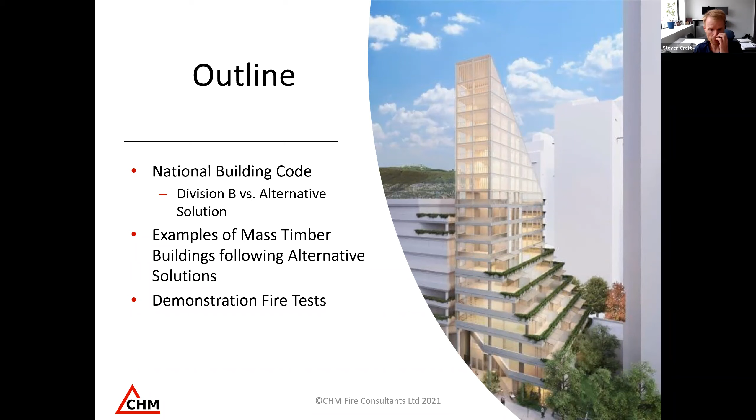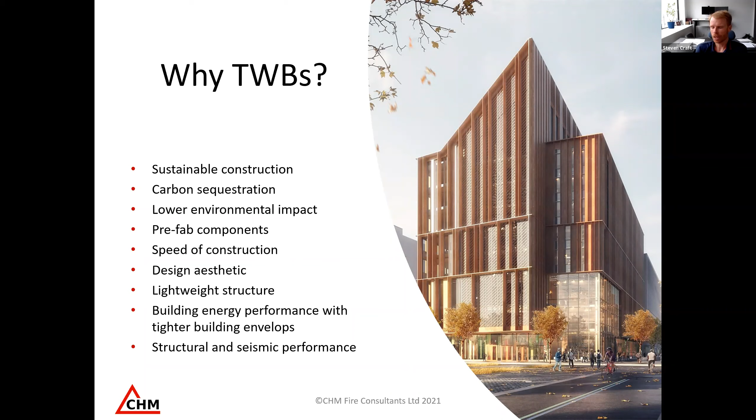I'm sure many of you are familiar with mass timber and some of its benefits. I included this slide because there are many different benefits, and some are realized on some projects and others on different projects, so they don't necessarily apply to every project. Things like sustainable construction, carbon sequestration, and overall lower environmental impact. But then there are practical aspects such as speed of construction due to components being prefabricated, so they show up on site and are quickly put in place, and the building can go up very quickly. Other potential benefits include a lightweight structure if soil conditions are poor—a mass timber building is going to be significantly lighter than a concrete building. One big aspect is the design aesthetics: with mass timber buildings, as opposed to concrete or steel, the structure is on display and is part of the interior finish. Certainly many mass timber buildings, that's a big part of it, and we'll see a couple examples of that today. In some projects there might be benefits to just the structural system, perhaps how it satisfies seismic performance or energy performance, so those will be project specific. But that's just some of the reasons why so many developers and architects are looking at mass timber these days.

With respect to the National Building Code, there are two ways to satisfy the requirements. One is to comply with the acceptable solutions in Division B, and that's, for example, for fire and for larger buildings, Part 3 of the building code. Of course, most buildings are designed this way.

It's certainly, when we're talking about average buildings, from a design perspective, it's very cost effective to follow the acceptable solutions in the code and basically follow it as a cookbook, and design our building that way from a fire safety perspective.

But there's another way to comply with the code, and that's using alternative solutions. Alternative solutions have to achieve at least the minimum level of performance required by the acceptable solutions in Division B, as defined by the objectives and functional statements. That's where many of these mass timber buildings come in, through the alternative solution process. We have to demonstrate that the building's as safe as what the code would require. So in many cases, when we're talking about taller mass timber buildings, that comes back to non-combustible construction.

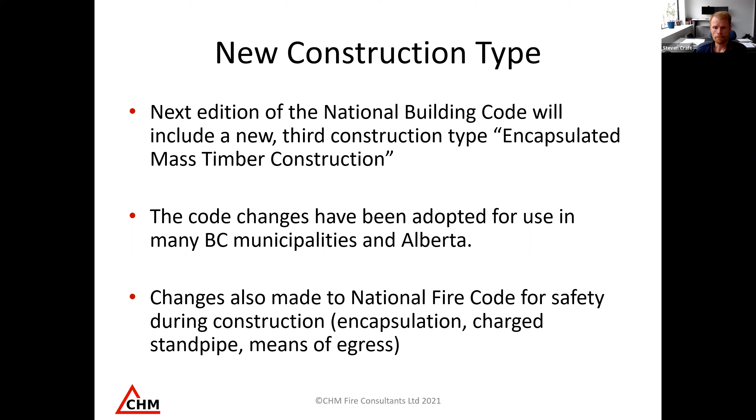So this new construction type, basically encapsulated mass timber construction, is exactly as it sounds: it's mass timber construction where a large amount of the structure itself is encapsulated. We'll look at how much on the next slide.

But these buildings can be up to 12 stories tall, with a height limit of 42 meters between the first floor and the uppermost floor. So whether that's the 12th floor, or perhaps the 10th floor, or perhaps a mezzanine, whatever the uppermost floor level is of the building. That 42 meters can be a little bit restrictive on a 12-story building, so it's something to keep in mind.

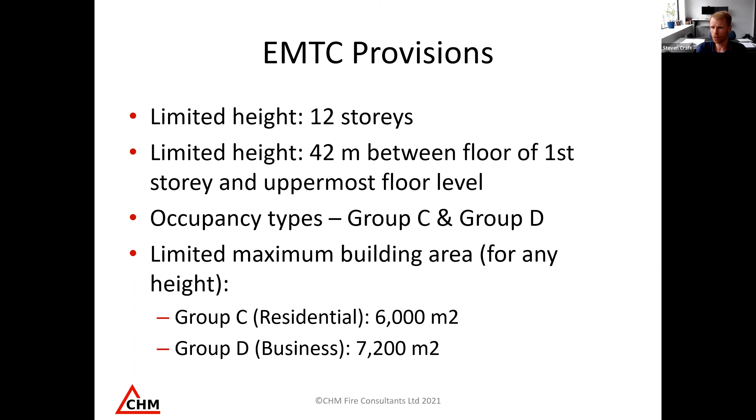Two primary occupancy types, Group C and Group D - your residential or office or professional services. The maximum building area, these are quite large buildings. The building area, basically the footprint of the building for residential, is 6,000 meters squared, and for Group D or business, 7,200 meters squared. So these are quite large buildings, as you can appreciate.

So some of the requirements for encapsulated mass timber construction, this new construction type: mass timber has minimum sizes. In developing these code provisions, there's a recognition that mass timber performs a certain way, largely because of its size, because in a fire it behaves differently than, say, light frame construction. Based on that, there are minimum size requirements for the mass timber itself.

These buildings are going to have 2 hours of fire rating for the floors, and of course supporting construction as required in the code. So basically what we would expect for a high-rise building.

Then for the encapsulation, there are generic solutions as well as a performance-based solution. The generic solution is 2 layers of 1/2-inch Type X gypsum board, on columns, on walls, on ceiling, basically on the mass timber. On the floor, the generic solution is a 38mm thick gypsum concrete or concrete topping - so 1.5 inches of concrete on the floor.

To deviate from these generic solutions, there's a new test method created under the ULC Fire Test Committee, known as ULC S146. Basically it looks at preventing temperature rise of the mass timber to a certain point for 50 minutes. The other requirement is that the encapsulation material be non-combustible. So things like mineral wool insulation could satisfy that, for example.

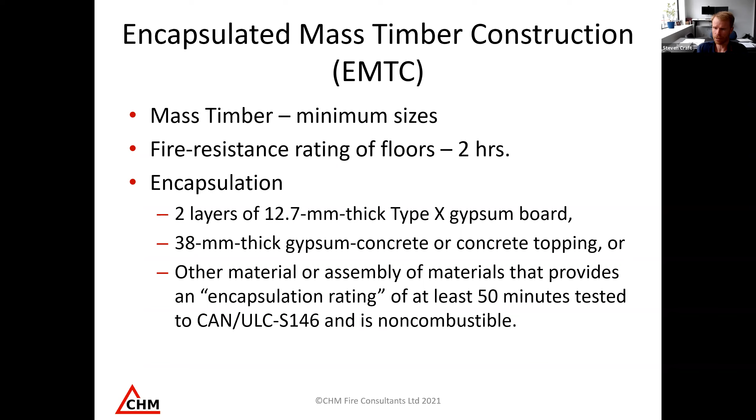As the name suggests, encapsulated mass timber construction means the structure is largely encapsulated, typically with gypsum board, but there are some exceptions allowing for some exposed mass timber in these buildings - exposed beams and columns with an area less than or equal to 10% of the perimeter wall area. This might sound a bit strange if you don't realize where these numbers come from. They've come from research tests where the amount of encapsulated or exposed mass timber has always been expressed as a percentage of the wall area.

That 10% limit doesn't allow for all beams and columns to be exposed, and it's rather restrictive. That's one of the reasons we see alternative solutions being proposed for these kinds of buildings, because architects would like to expose more than the 10%.

Similarly, in projects with mass timber walls—which is relatively rare, perhaps with the exception of exit stair or elevator shaft walls—generally we don't see mass timber walls. But if there are walls, up to 35% of the perimeter wall area can be exposed for mass timber walls, and ceilings up to 10% can be exposed. So if it's a CLT floor assembly, the ceiling underneath, 10% of that CLT can be exposed. Or if there's no walls, 25% of that ceiling.

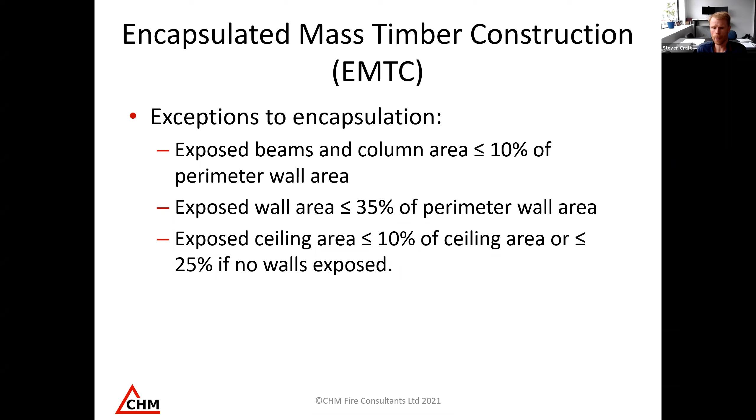So those are the new prescriptive requirements. And of course, the other way to comply with the code is through alternative solutions. Certainly the majority of projects we see right now are following the alternative solution pathway for mass timber, as opposed to following even the prescriptive requirements for encapsulated mass timber—which aren't accepted yet in many jurisdictions, for example Ontario. It's generally recognized that if you follow that design philosophy, it's a relatively simple alternative solution.

But once we deviate from that, it becomes more complex and we have to go back to research to demonstrate performance. So what I wanted to mention is that the alternative solution has to achieve at least the minimum level of performance required by Division B, in the areas defined by the objectives and functional statements attributed to the acceptable solution.

So basically, if a building is required by Division B to be non-combustible construction, and we're developing an alternative solution using mass timber, we have to demonstrate that the performance of that building using mass timber is as good or better than the non-combustible construction solution.

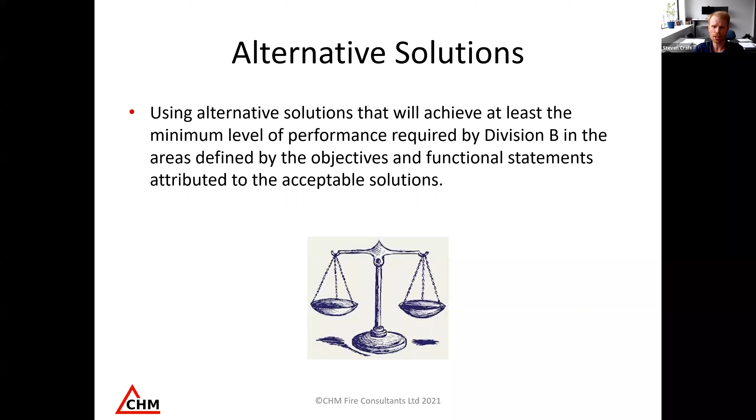So I'm going to just very quickly go over two projects. As far as exposed mass timber goes, they're at different ends of the spectrum, but I'd suggest they're both quite conservative designs.

The first is Brock Commons, which I'm sure most of you are familiar with. It's the very first tall mass timber building built in Canada, built in Vancouver at UBC, designed by Acton Ostry Architects. Fast + Epp did structural, GHL did the fire safety, and RDH did the building envelope.

This was an 18-story building: first level of concrete, 17 stories of mass timber. It's a student residence with 305 units. This building was constructed very quickly—in terms of actual construction, I think it was a couple floors per week. A large part of that was the simplistic design of the structure, but also the exterior wall was able to go up as the building went up. It was a pre-manufactured curtain wall, which was very efficient. It does have concrete exit stair and elevator shafts.

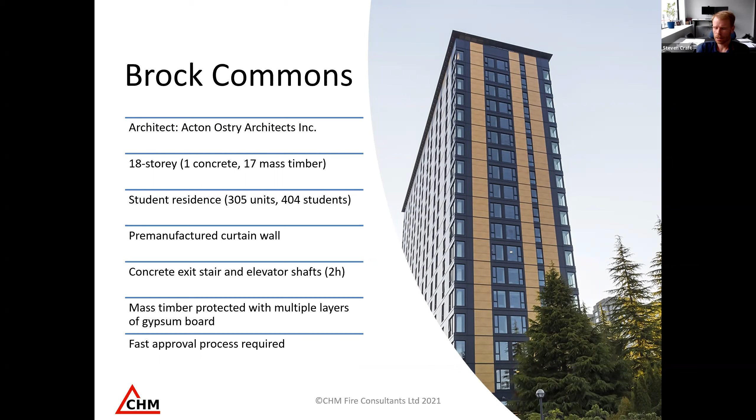And as we'll see on the next slide, this project was fully encapsulated. So the picture on the left shows the structure before the gypsum board was installed.

And the picture on the right depicts what the finished product looked like. Basically, there were 3 layers of 5/8 Type-X gypsum protecting the mass timber. So the 2-hour fire resistance rating required for this building was fully provided for by the gypsum board. Since the gypsum board is providing the entire fire rating, it really doesn't matter what's behind it, whether it's a steel structure or a mass timber structure. We would never expect that mass timber to ever be involved in a fire.

Because of that, this was a very conservative approach, basically not relying on the mass timber. We know that mass timber can have excellent fire resistance and inherent fire resistance, but in this particular project, they didn't rely on that at all. The fire rating was fully provided for by the gypsum board.

The reason they took this route was because they needed very quick approval if the project was going to go ahead as mass timber. I think they needed approval in a couple months. And as you can appreciate, prior to this, there were really no tall mass timber buildings in Canada. Probably the tallest one before this project was the Wood Innovation Design Center in Prince George, which was by code 6-story, but because it had a mezzanine, perhaps more of a 7-story building with relatively tall stories. So previous to this project, that was the tallest.

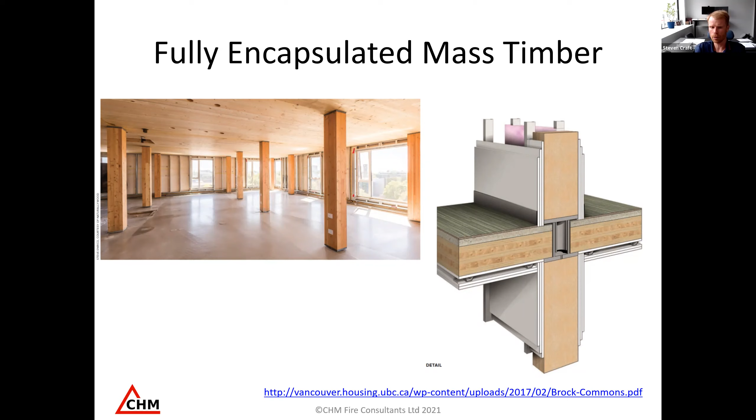So that's one end of the spectrum in terms of encapsulating the mass timber and demonstrating compliance through the alternative solution process. While the process for this project was actually a site-specific regulation - they amended the building code to allow for this design - basically the documentation and what was done for this project followed an alternative solution procedure, what we would expect would be submitted for an alternative solution.

The next project I'll touch on is one that has building permit approval, but I don't think they've broken ground yet. This is the arbor at George Brown College in Toronto. Moriyama Teshima Architects and Acton Ostry Architects are working together on this project. Fast + Epp are doing structural, and we're doing the alternative solution for mass timber, supported by GHL consultants for the other code compliance and alternative solutions not related to mass timber.

So this is a relatively interesting project. It's 10 stories. It's an A2 occupancy. Let's switch to the next slide.

So here's some renderings. As I mentioned, the building's construction hasn't started yet, but this gives you an idea of what the building will look like. Basically it's designed to be largely exposed mass timber. But if you look at the right top photo, you'll see that in the classrooms, for acoustic purposes, they generally have quite a bit of protection on the mass timber because of drop ceilings and whatnot.

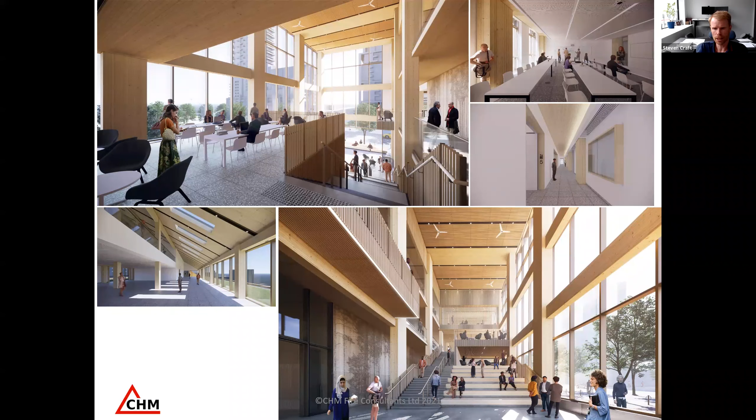So for this project, we went through the design process to basically demonstrate performance equivalent to a non-combustible building. It went through peer review as well as part of the process to approval by the City of Toronto. Some of the mitigating features I'll briefly touch on: again, we took a relatively conservative approach to this building, being the first A2 university or academic building in Ontario at 10 stories.

So one of the things we've seen in Toronto on other mass timber projects that has set a bit of a precedent is upgrading the sprinkler system from low hazard to ordinary hazard, group 1. That upgrade results in about 50% greater water delivery through the sprinkler system in the event of a fire. So this project has that. There are a number of upgrades to the sprinkler system, so that's one of them.

The second is having 2 connections to the city water mains, 2 separate connections for redundancy. Similarly, there's a second fire pump for redundancy, and a second riser with valves isolating each floor. The idea there is again for redundancy, so that if one floor needs to be worked on for a retrofit, the sprinkler system for the building doesn't need to be shut down, just that single floor can be. So those first 4 items are really targeting the reliability of the sprinkler system. We know sprinkler systems are very reliable as they are, something on the order of 90 to 95% reliable, and this is bumping that up to likely something on the order of 99%.

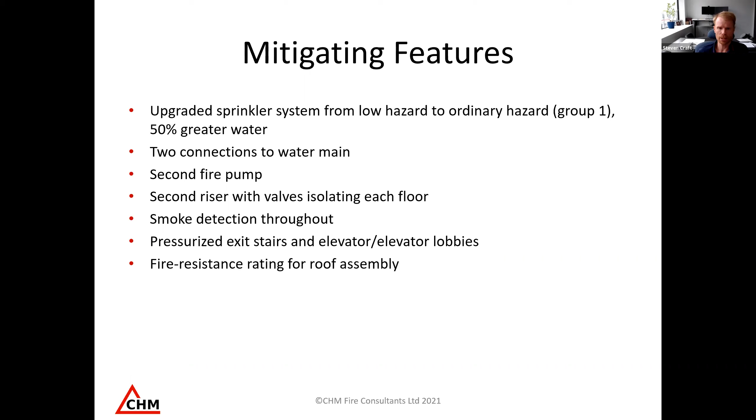Similarly, we're also working on the academic tower, a project at the University of Toronto. This is a 14-story building, and I won't go through the mitigating features, but they're largely similar to what we've done for George Brown, given that this is also A2 occupancy. So again, we've taken a relatively conservative approach, and again it's one of the first of its kind in Canada.

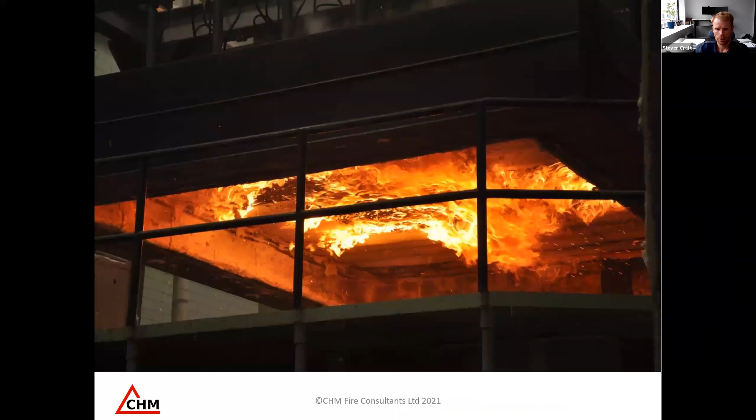One thing I'd like to point out, and we'll see this a little later as we look at some videos, is that mass timber performs differently than light frame construction. That's why mass timber in the latest iteration of the code has been somewhat separated out from combustible construction, since requirements for combustible construction are largely based on light frame construction.

Here's an example of a CLT floor assembly with gypsum board, protected by gypsum board, at the end of a fire test. This was well after an hour into the fire test. The gypsum board had started to fall off, and the test was terminated. This is the floor assembly being lifted off the furnace after the fire test.

The picture we're looking at right now is just as that floor assembly comes off the furnace, which is on the order of close to 1,000 degrees Celsius. So a lot of heat in that furnace, a lot of radiation up at that floor assembly as it's lifted off, and we see that the mass timber is flaming and burning.

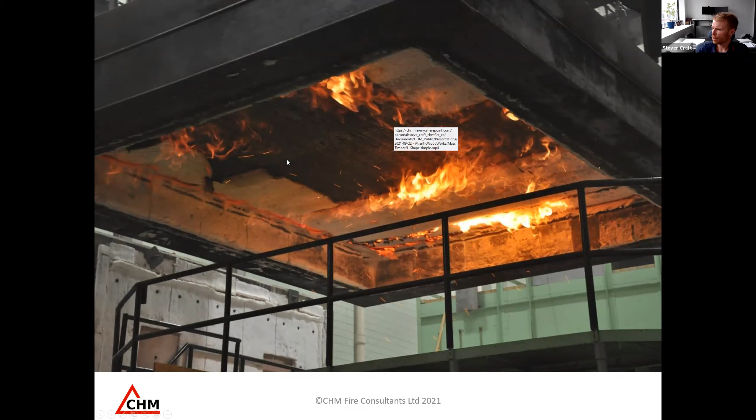In the next photo, you'll see that as the floor is moved away from the furnace, not even entirely moved away yet, but perhaps half of it is now to the left of the furnace, we see the flaming almost immediately goes out on the mass timber. In the central portion of the floor assembly, the flaming has gone out.

We do see some continued flaming around the edge of the gypsum board where the heat is somewhat trapped in, and we get some re-radiation between surfaces. But this was one of the first examples we had, about 11 years ago, when I completed this test, where we saw that mass timber doesn't continue to burn without an external heat source, whether that's fuel contents in a compartment or other surfaces radiating heat back. This was a perfect example of that, and we'll see it in the photos and videos near the end of this presentation.

I don't have time today to go through all the research projects that led to this point, in terms of having the building code recognize mass timber or encapsulated mass timber construction as a building type. But I will touch on a couple of more recent projects that perhaps aren't reflected in the building code today, or the building code as will be published later this year, and are likely to influence the building code in the next iteration.

The first is some testing done at Southwest Research Institute in San Antonio, Texas. There were a number of research projects conducted before this that led to changes both in the National Building Code and the International Building Code in the US.

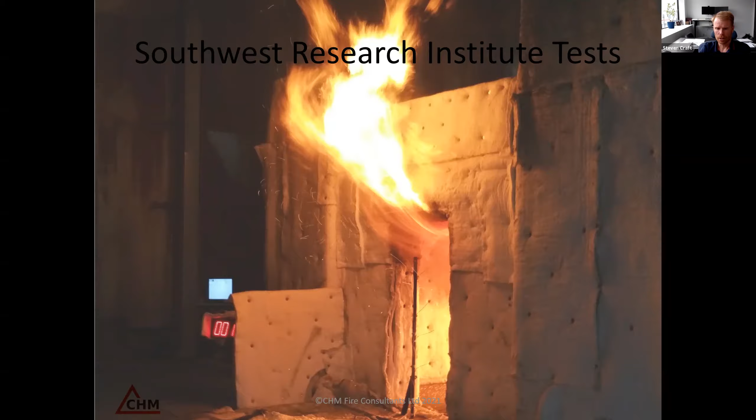One of the things that we want to see is that the fire will die down on its own, similar to non-combustible construction. A set of tests were done at Southwest looking at different adhesives, and a standard test was developed to test the adhesives in CLT. It's a full-scale test that basically tests the adhesive being used to ensure that the CLT doesn't delaminate and therefore affect the fire performance.

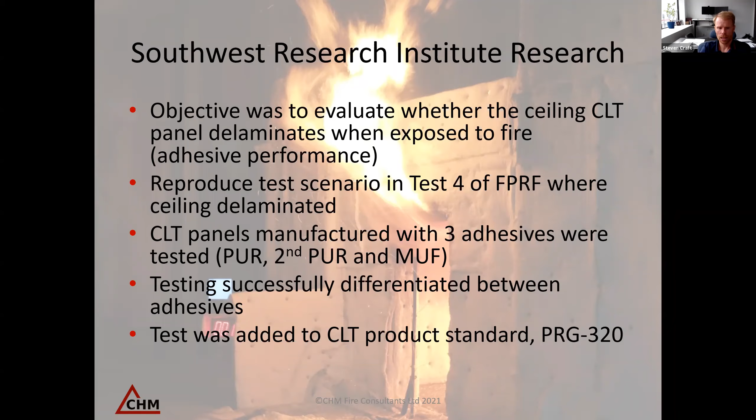After this change was made to the product standard, the National Research Council undertook a number of tests with this second generation CLT, to look at fire performance and see how it might be different. At their lab in Ottawa, they were restricted on size but were able to build rooms 4.5 meters by 2.4 meters by 2.7 meters high. A relatively small room, but we know that makes for a relatively severe fire test because surfaces re-radiate a lot more in a small space.

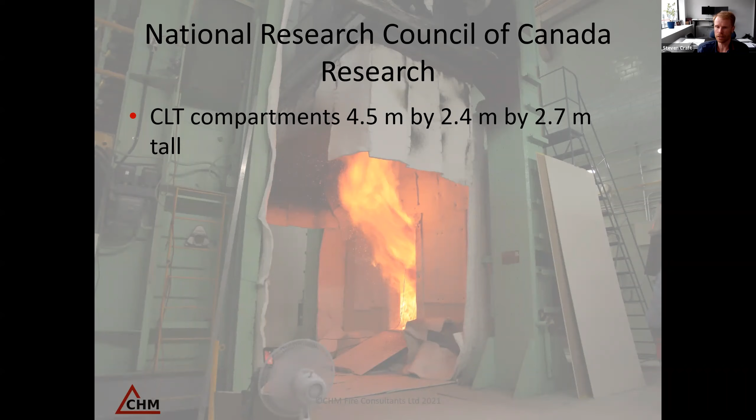CLT was used that was manufactured using the new adhesive requirements, and 5 tests were done. The first test was the CLT room with 3 layers of 1/2-inch gypsum board, and we saw no contribution from the mass timber as expected. That creates the baseline test that we compare the rest of the tests back to, to understand the contribution of the mass timber.

Test 2 exposed the back wall of the room and 10% of the ceiling, meeting the current provisions being added to the building code later this year. Test 3 had an exposed beam and column, or beam and 2 columns. Test 4 had an exposed ceiling with a beam and column. Test 5 had exposed ceiling and end walls.

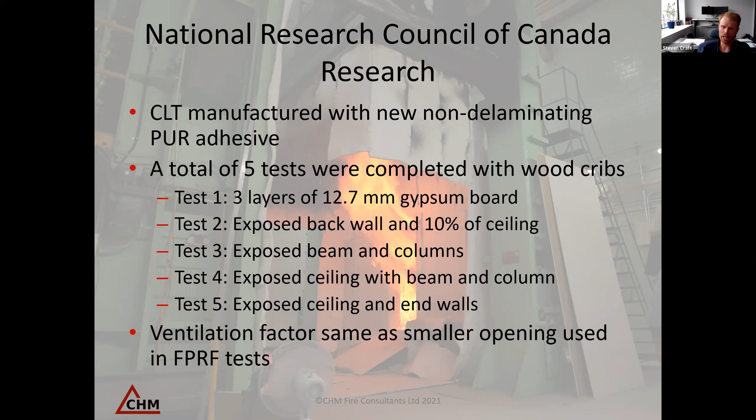It's test 4 that I really want to focus on here, because that generally captures the likely scenario for perhaps 90% of projects, where we have post and beam construction, beams and columns, and mass timber floors. In most of these projects we don't have mass timber walls, so test 4 best reflects the maximum exposed mass timber we might see in a project.

Here's the picture of the test setup prior to the test. The room is right here. There's a doorway - this is the only opening into the room - and there's a vent hood that captures the fire gases.

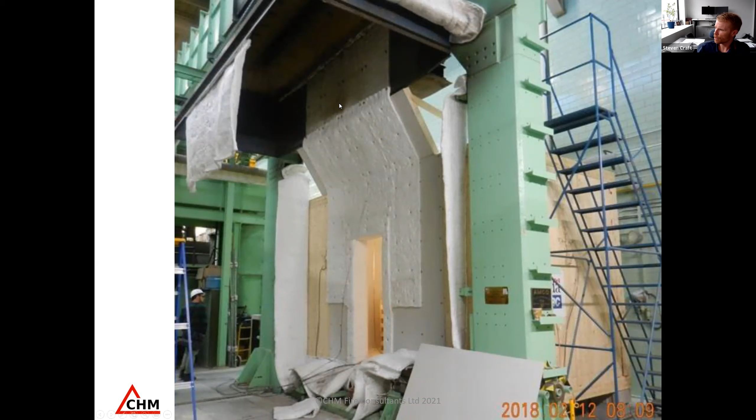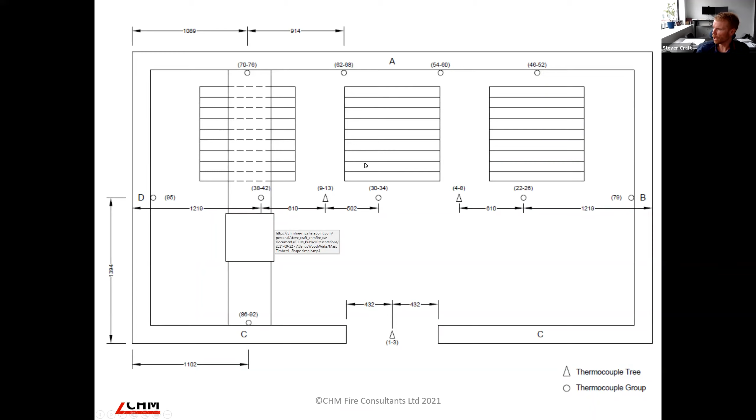It works out that the fuel load on a per-area basis is a little bit over the 50th percentile for what we'd expect in a residential building or unit. As you can see, there's exposed ceiling, beams, and the column. In these tests they were able to measure the temperature in the room, which allows us to compare between the two tests. Unfortunately, they weren't able to measure the heat release rate, which is a better way to quantify the size of the fire, but these temperature measurements give us a good idea.

So the graph on the left is for the fully encapsulated room, fully clad in gypsum board with 3 layers. The mass timber doesn't play any role in that fire, so that is likely what we would expect in a non-combustible building.

That has gypsum board on walls and ceiling. And then the picture on the right, or the graph on the right, shows the exposed column, beams, and ceiling room test. You'll see the temperatures, particularly after about an hour, continue for some time.

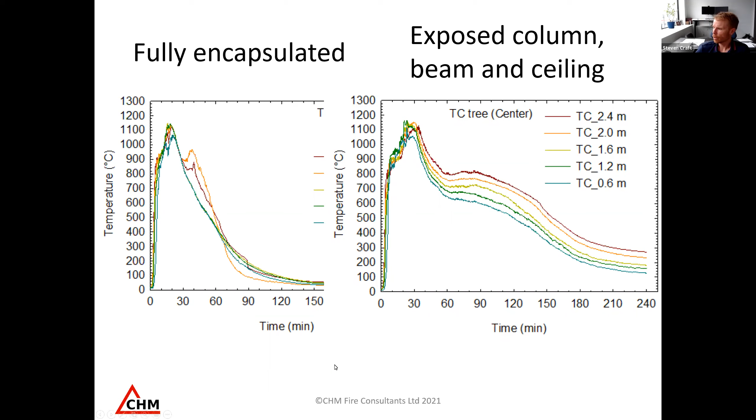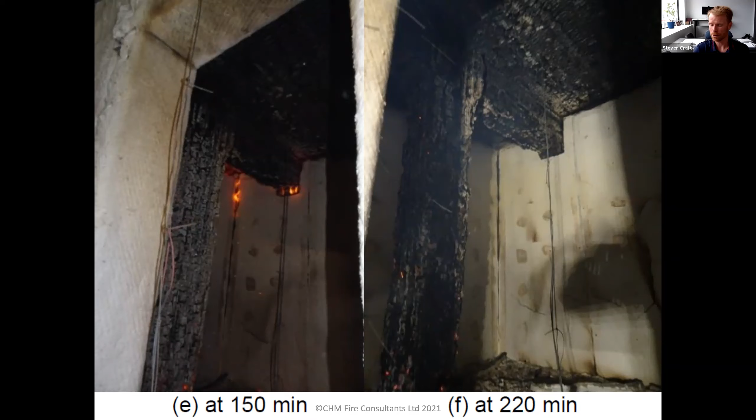After this test, we cut out a section of the glulam column and measured the dimensions of the non-charred portion. It turns out that after that 4-hour test, we saw charring pretty close to what we would design for a 2-hour standard fire resistance test, which is what a high-rise mass timber building is designed for. So that was interesting that it lined up fairly closely with what we're designing for.

So just a couple of the conclusions that came out of that research from NRC. First, it demonstrated that the CLT with the new adhesive requirements performed very well, and we didn't see any fall off of the charred wood or fire regrowth, which was expected, but good to confirm.

In test 2 and 4, remember test 2 was the case where there was 10% of the ceiling and the back wall exposed, which would meet the requirements going into the code to be published later this year. In both cases, the fire decayed once the room contents were consumed. NRC concluded from these tests that the scenario with the exposed beam, column, and ceiling is unlikely to cause a significant increase in fire risk.

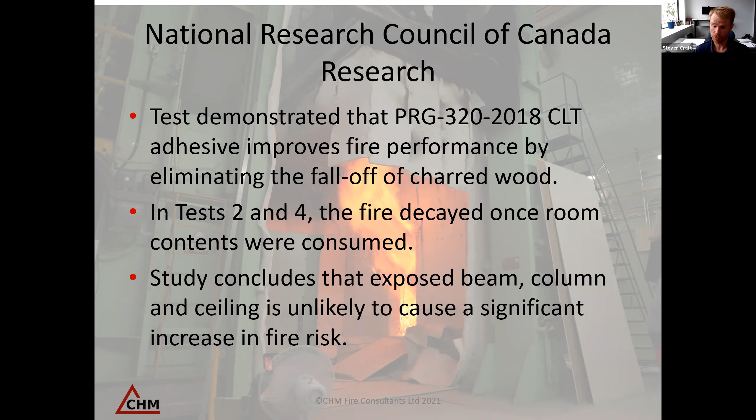So that was positive. As I mentioned, it's a relatively small room. It's relatively conservative from our perspective, looking at the fire dynamics. However, there's certainly a benefit to looking at larger structures.

And so that brings me to some demonstration fire test work that has been going on for about a year. This is a large project with a number of funders and partners. The funders include Natural Resources Canada, British Columbia Forestry Innovation Investment, BC Office of Mass Timber Implementation, the Ontario Ministry of Natural Resources and Forestry, Government of Alberta, National Research Council, and then partners include Canadian Wood Council, CHM Fire Consultants, and GHL Consultants.

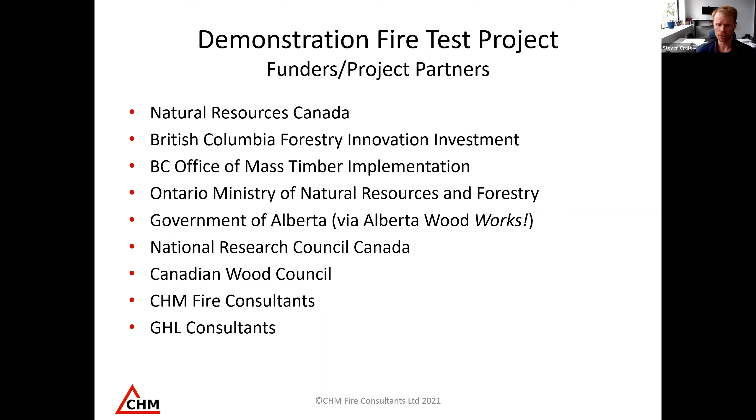Basically, we're planning a series of demonstration tests. Some pilot scale tests were completed earlier this year in Richmond, which we'll take a look at next, as well as some full scale tests being planned for Ottawa next June. So we'll just quickly touch on those.

I think these pilot scale tests will be of interest, even though they're small. It's really conveying some of these principles that I've mentioned earlier. So in the pilot scale demonstration burns in Richmond, there were 4 assemblies that were constructed. 3 of them are 10-foot by 10-foot boxes. One was light wood frame construction without gypsum board, basically representing a during-construction fire scenario.

The second box had gypsum board on the light frame walls and ceiling. And then the last one was mass timber. Really the aim of these three tests was to demonstrate how mass timber is different from light frame. So we'll look at that in the next few slides.

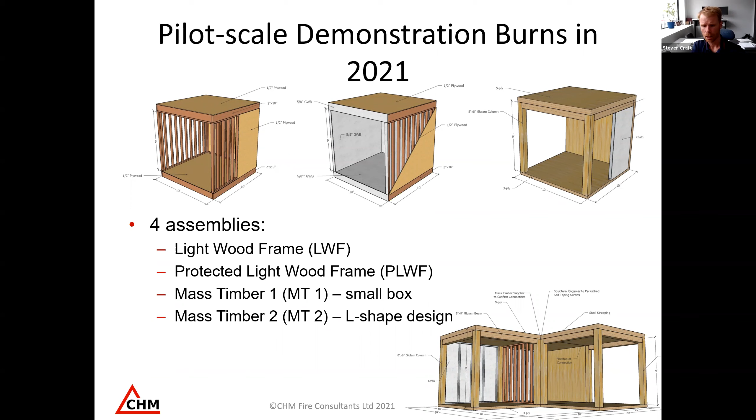And then the structure at the bottom was an L-shaped design, basically three of these 10-foot by 10-foot boxes put together to make an L-shape. So it was a slightly larger structure, again representing the during-construction scenario. These demonstrations were to provide information on the concern of a fire during construction for mass timber. But as you can appreciate, whether it's during construction where the mass timber is fully exposed, or in a finished building where the mass timber is exposed with perhaps differences in ventilation, the performance of the mass timber is quite similar.

So out of these three boxes, I have a quick video I'll play, which basically shows how each of these boxes performed when we had a garbage can fire representing a garbage can on site during construction. This is a relatively small fire, although as far as garbage can fires go, I would say it's probably about as severe a garbage can fire as we could design in terms of ventilation and whatnot.

But as you can appreciate, for the gypsum board clad room, we would expect very little damage or virtually no impact on the structure. For the mass timber, we expect the mass timber wall would be involved a little bit, but we would not expect it to spread to the ceiling. And then the light frame box, as we've all seen construction site fires on light frame buildings, we know how easily they go up. So we would expect that one to become fully involved. This was really an attempt to demonstrate that.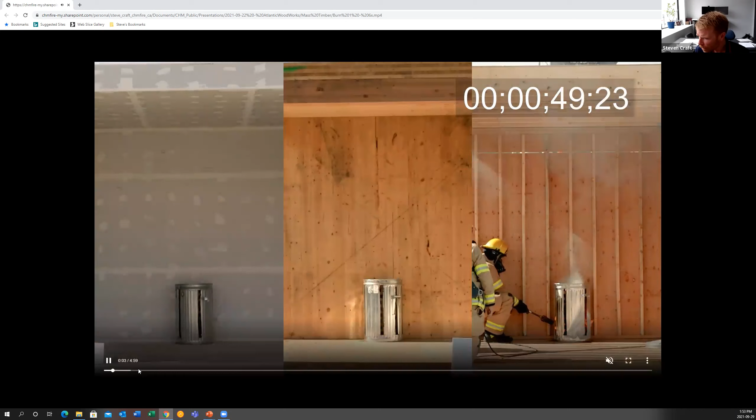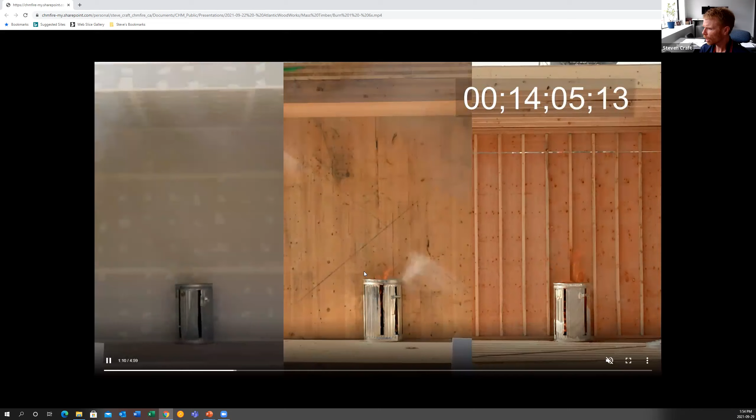Sorry for the sound, we don't need that. I'm going to skip ahead to 1 minute because it took a little bit for this garbage can to build up to any significant fire size. So on the left, we have the gypsum board clad room or box. In the center, we have the mass timber box. And on the right, we have the light frame box.

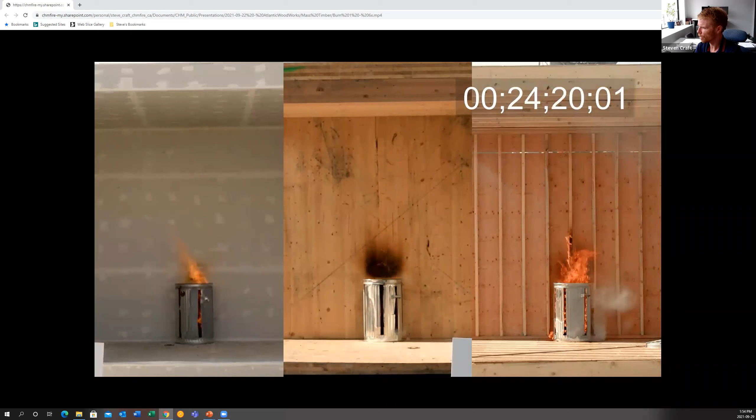Just as I mentioned, we expect that nothing really happens in the gypsum board box. In the mass timber box, we expect a little bit of charring on the mass timber, but no significant fire spread. And then light frame, we would expect the box to be lost. As the fires grow in these garbage cans, we get to a point where the flaming is perhaps just a little bit short of the ceiling. You'll notice in the light frame on the right, as the wall starts to ignite and contribute, that flame height will continue to grow till it hits the ceiling.

For the mass timber, we get a little bit of flaming on the wall, but you'll notice as that wall chars and builds up that little bit of insulation, the flaming largely goes out, and then it's just the flame from the garbage can, which we can kind of see now.

Just so you know, this video is sped up 6 times. That's why we see such quick fire development. But the clock on the top right reflects the actual time.

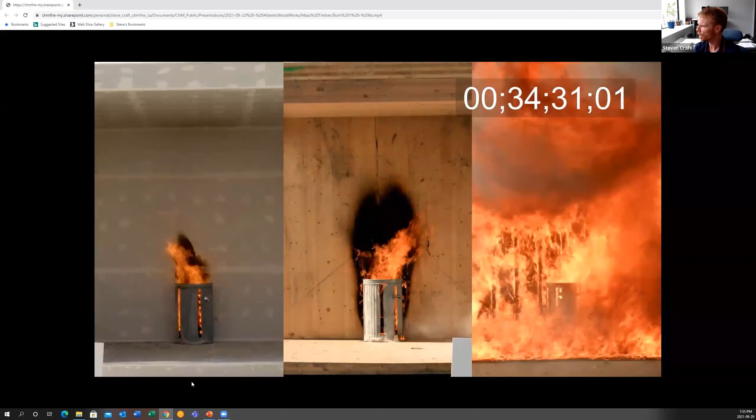As we would expect, the light frame gets fully involved pretty quickly. It will die back, you'll see, before it takes off again a little later. The mass timber is burning a little bit, but as it chars and builds up the char layer, it will contribute less and less to the flaming.

So the flaming, even from a relatively severe garbage can fire up against the wall, is really unable to climb up the CLT and reach the ceiling. On the right, we see the light frame structure fully involved, and of course it basically continues until it collapses or is extinguished.

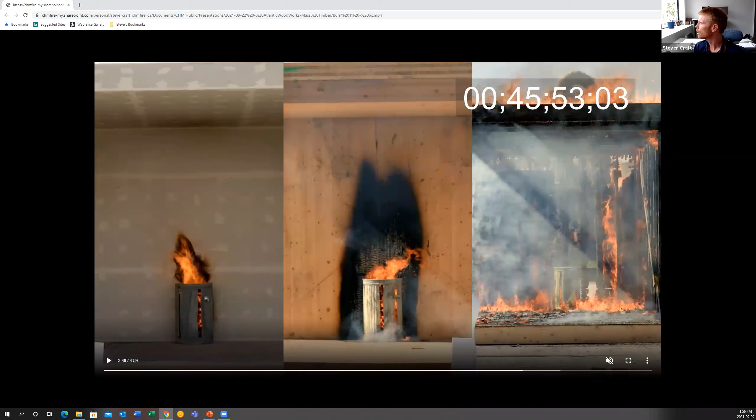So perhaps I'll stop this one here in the interest of time, and we'll look at the next one.

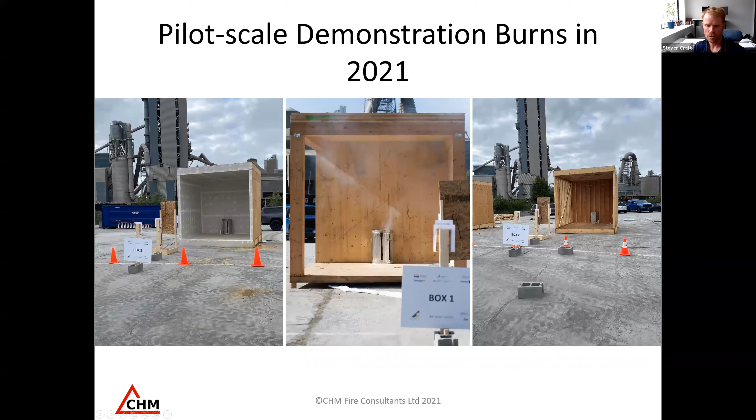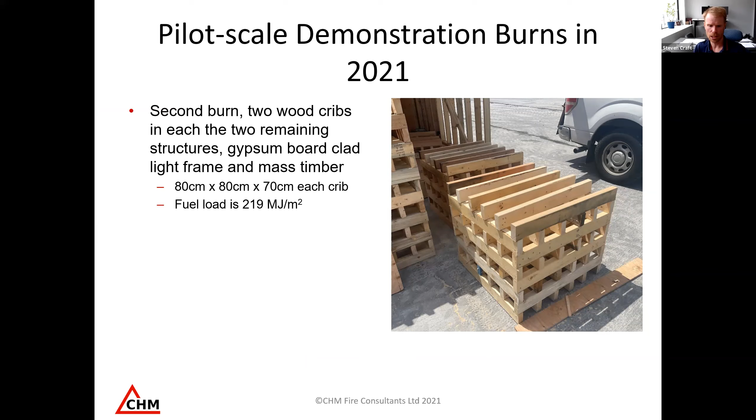Because the gypsum board box and the mass timber box in those tests survived, there was another set of tests done in those same boxes with a larger fuel source, this time wood cribs. These wood cribs are about 80 centimeters square and 70 centimeters tall, and 2 of them were placed in each box. You'll see that this creates quite a bit more significant fire in these compartments.

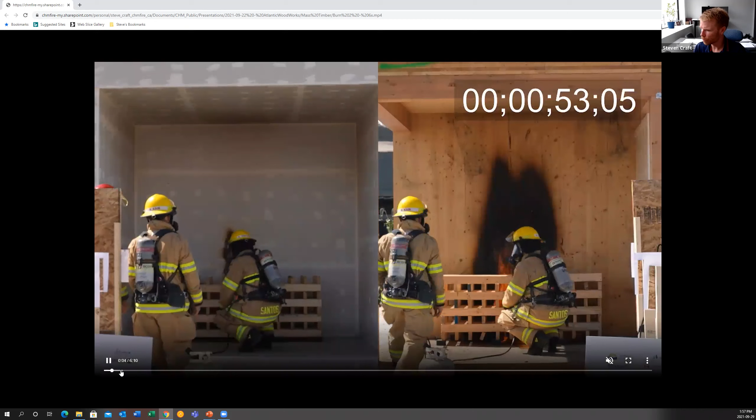Similarly, I'll play this video. I will skip ahead a little bit here. These fires do build rapidly. I think the one on the mass timber builds a bit faster. They have to reignite the one on the left to try and get it to catch up.

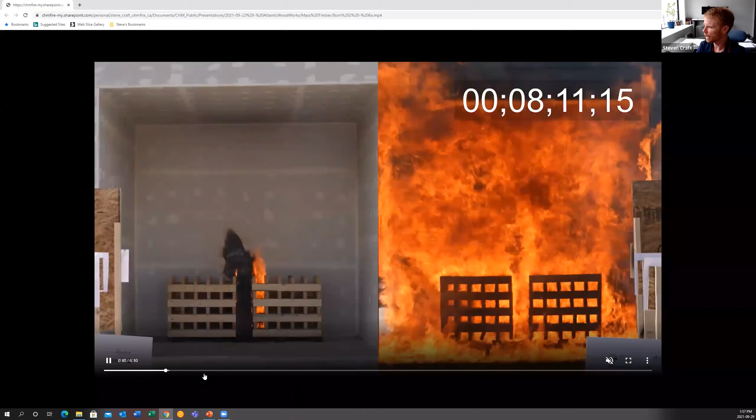As the fire grows in the wood cribs, you can see it's a much more severe fire. It does involve the mass timber to a great degree. But one of the interesting things we'll see on the right, as the mass timber burns and chars, is that the fire will die down to the point where it's really just the wood cribs burning, and the surface of the mass timber, now somewhat protected from a thin char layer, becomes much less flammable or contributes much less to the fire.

So you'll see the wall on the back has largely stopped contributing, and the ceiling will as well as we continue. It looked very severe on the right because it is so far ahead of the gypsum board box on the left, but you'll notice that the fire severity on the left in the gypsum board box also becomes quite severe as it becomes fully involved.

You'll notice that at this point, the mass timber is really not flaming too much, a bit on the ceiling there. You'll even see that die down as the fire continues.

This would be during construction, perhaps, where there is no sprinkler system. We have quite a severe or quite a significant fuel load. But at this point, it would be very easy to apply water to that fire and extinguish it on the right in the mass timber box, similarly on the left.

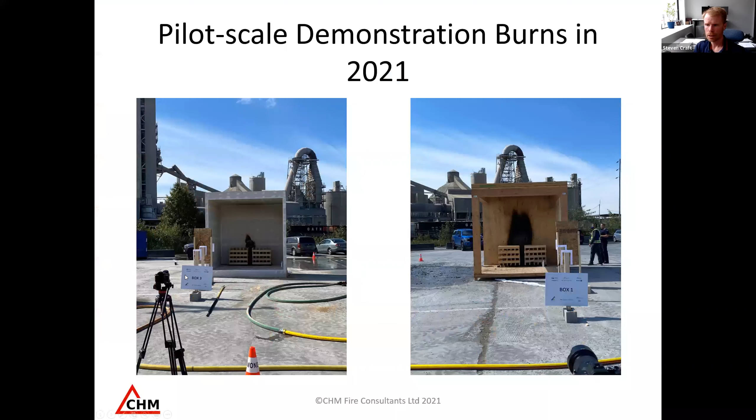Lastly, I'd like to show a video from the pilot scale, or sorry, from the L-shaped box. Now this is a very severe fire. We've got 6 wood cribs in this structure. This one is sped up a little bit more, sped up 10 times.

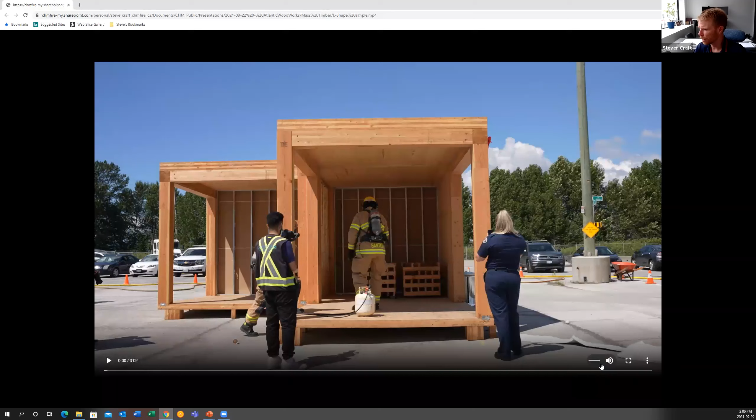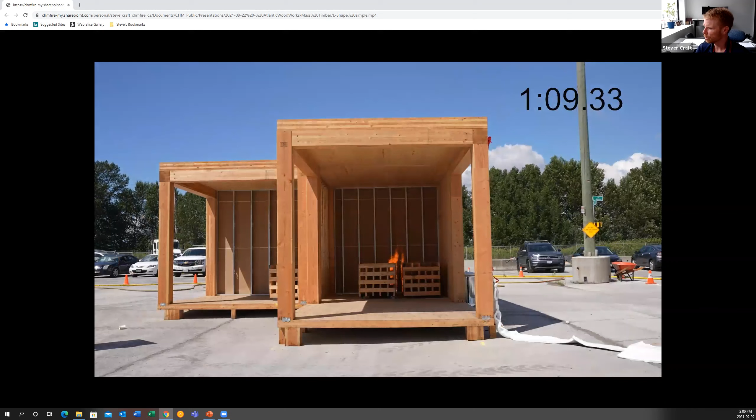We'll see this one will grow very quickly. It will be very intense for a few minutes, and then it will die down on its own. The clock, again, on the right-hand side is accurate. There was methanol in all these tests: a methanol pan at the base of the wood cribs to ignite them.

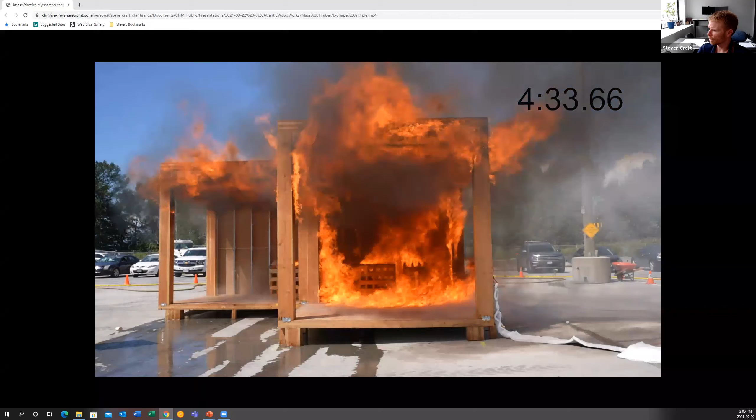You'll appreciate this is an extremely severe fire. All the surfaces are exposed and burning. This is 4 and a half minutes into the test.

Wood cribs, 6 of those wood cribs, provide for a very significant fire. By about 7 minutes or so, the fire was going out on the floor, and now it's dying down on the ceiling at 10 minutes. The right wall is mass timber CLT, and it is contributing at this point because of the 4 wood cribs next to the wall.

At 13 minutes, or I think at about 15 minutes, we start to see the flaming on the ceiling die down, perhaps at 14 minutes. The gypsum board on the back wall, which was steel stud, has started to fall out, and that's also contributed to some of the heated gas escaping more readily. But again, we see that the fire dies down on its own once we get a significant char layer built up, with no intervention.

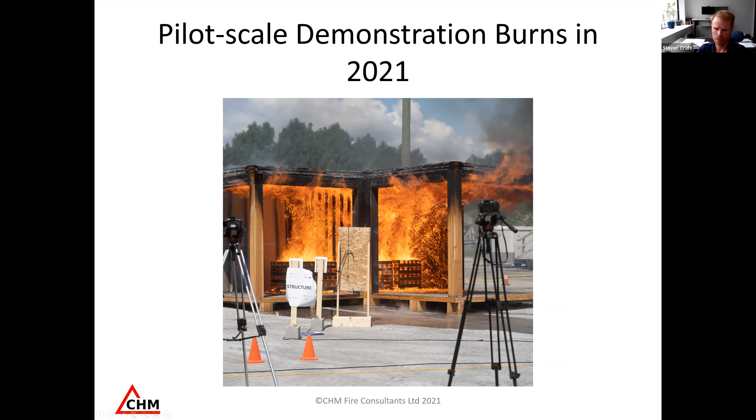So again, that's pilot scale. It's showing some of the concepts that we're looking at, but we do want to also demonstrate this through large scale testing. That's partly what we've been working on for the last year or so, designing a set of full scale tests.

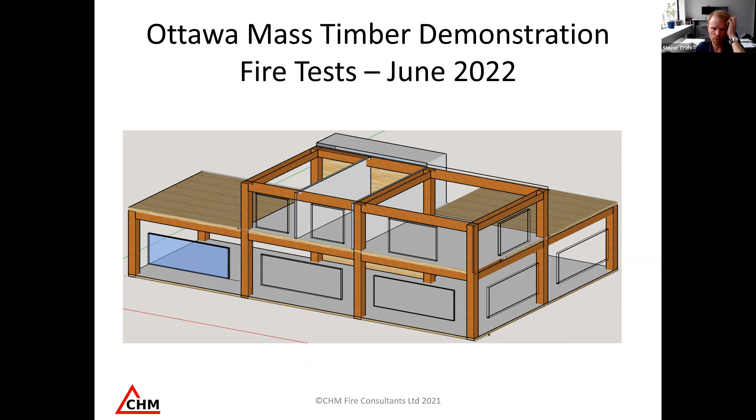You see a rough rendering of the structure on this slide, but it gives you the basic idea. This is a relatively large structure. One of the primary objectives is to demonstrate the fire dynamics in a large open office floor plan. All of the testing done to date has looked at residential compartments, relatively compartmentalized buildings. Many of our projects are office buildings with open office floor plates, and while we have a pretty good idea of how the fire is going to behave in that space, we'd like to be able to demonstrate that.

In this case, the structure on the first floor has bays that are each 7.3 meters by 7.3 meters, relatively large spans. We have 3 bays across the front and 2 bays back, so a structure that's on the order of perhaps 22 meters by 15 meters or so, and 2 stories.

One of the primary tests we're looking at doing is on this open floor plate on the first story: starting the fire at one end and seeing how it spreads throughout the space, and in particular what happens after the fire has consumed the fuel load we're putting into the space. How does that fire decay, as we've seen in other tests? Of course, we want to see it decay, we don't want to see it continue to burn. So that's one of the primary tests.

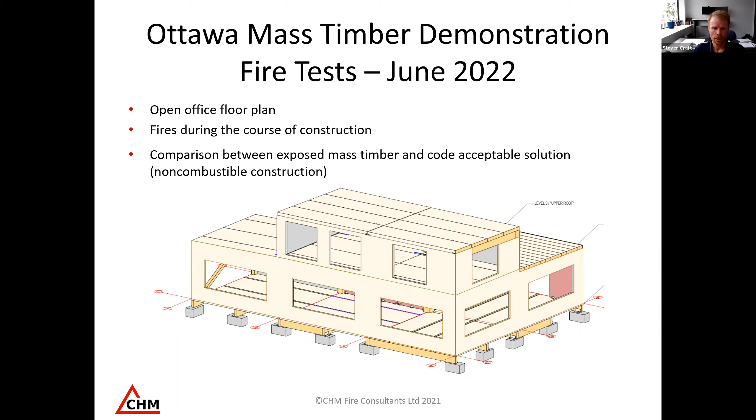I think we have a little bit of time left, hopefully. I think I went over a little bit.